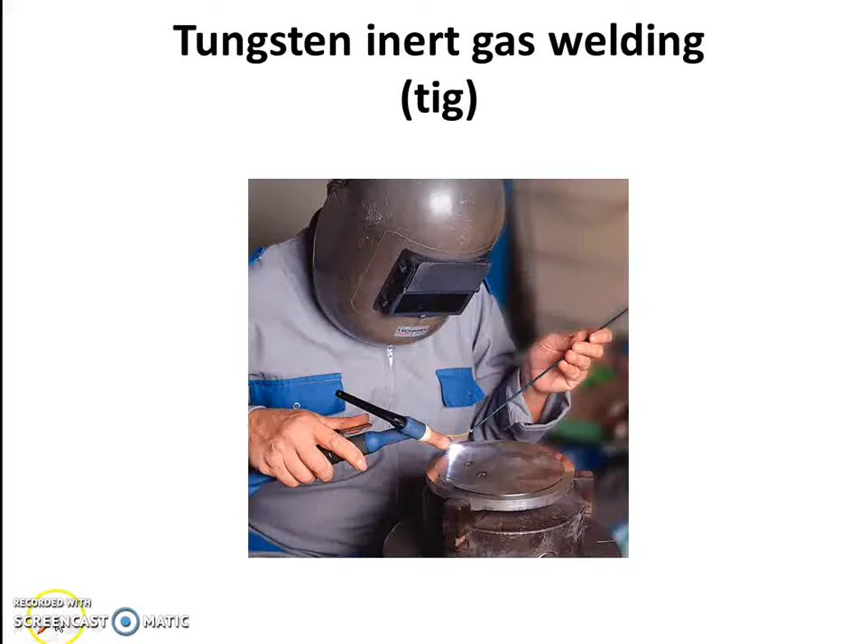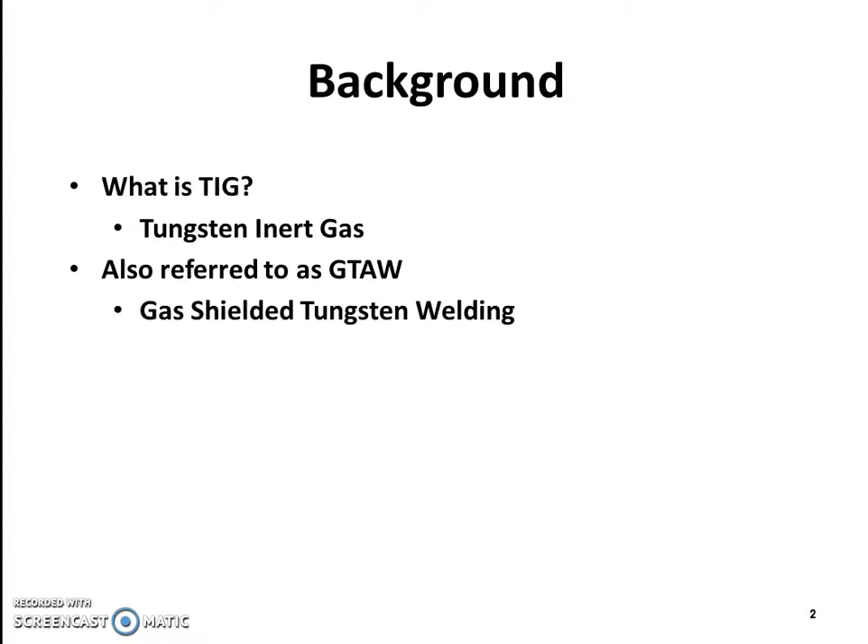Tungsten inert gas welding, or TIG welding. The background of TIG welding: it is also referred to as GTAW, that is gas tungsten arc welding. In TIG welding, a tungsten electrode heats the metal you are welding, and gas, most typically argon, protects the weld from airborne contaminants.

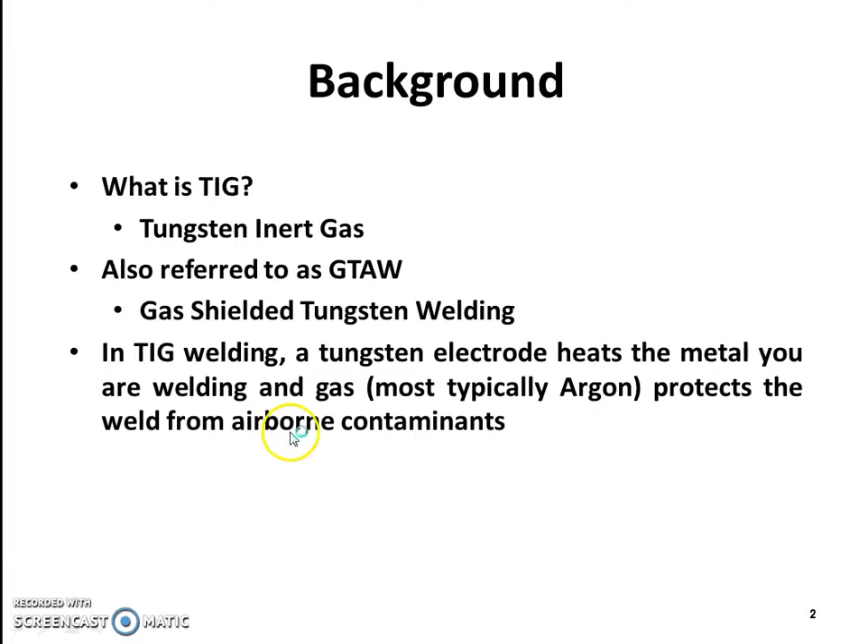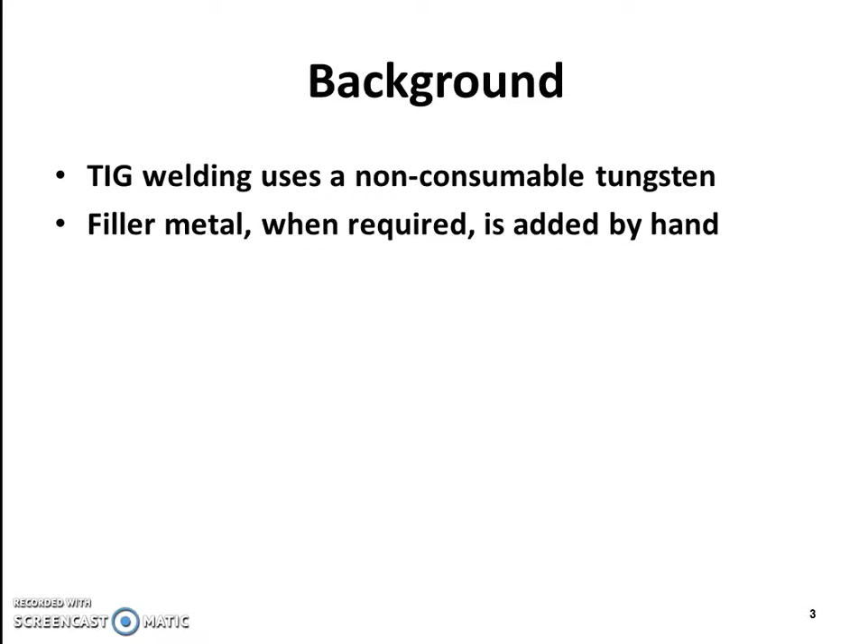TIG welding uses a non-consumable tungsten electrode. The filler metal, when required, is added by hand. Shielding gas protects the weld and tungsten electrode.

Gas tungsten arc welding, that is GTAW, is a process that melts and joins metals by heating them with an arc established between a non-consumable or uncoated tungsten electrode and the metals. The weld pool temperature can approach 2500 degrees centigrade.

The tungsten electrode is used to make the arc. It is contacted with a water-cooled copper tube to prevent overheating. A shielding gas goes through the torch body and nozzle toward the weld pool to protect it from air. A filler material for joining thicker materials is fed manually or automatically. This is the filler rod, and this is the shielding gas and the power source. This is contact tube.

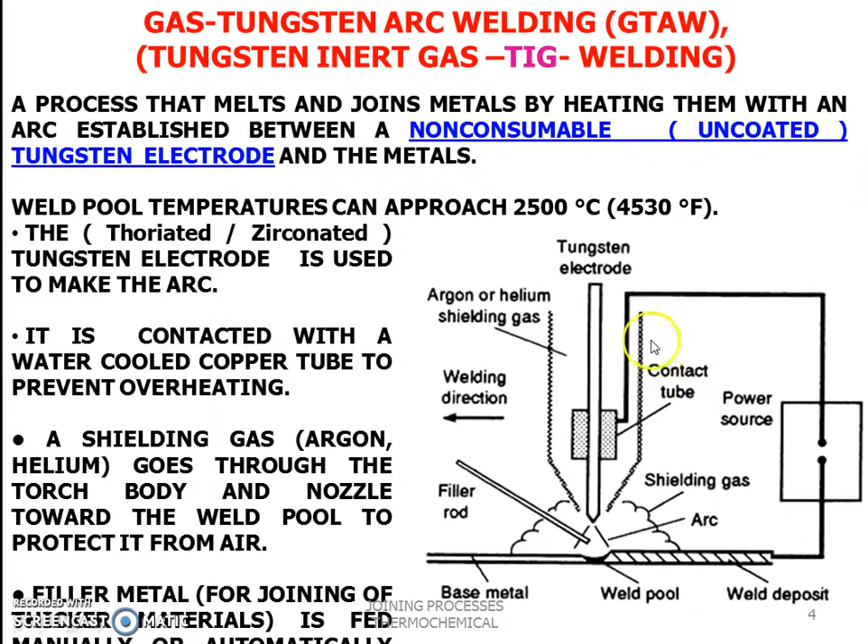Arc starting with high frequency. The torch position on the left shows the recommended method of starting the arc with high frequency when a torch is held manually. By resting the gas cup on the base metal, there is little danger of touching the electrode to the work. After the arc is initiated, the torch can be raised to the proper welding angle.

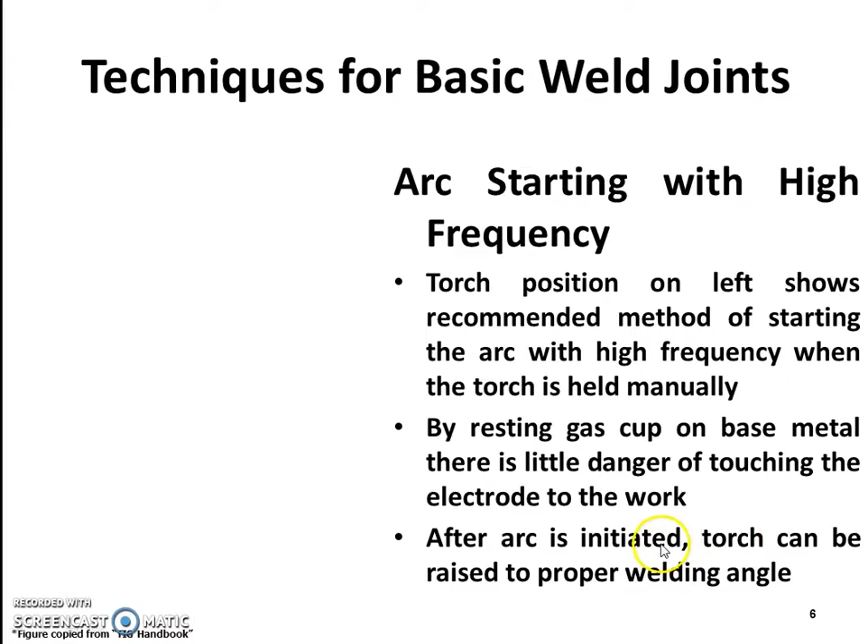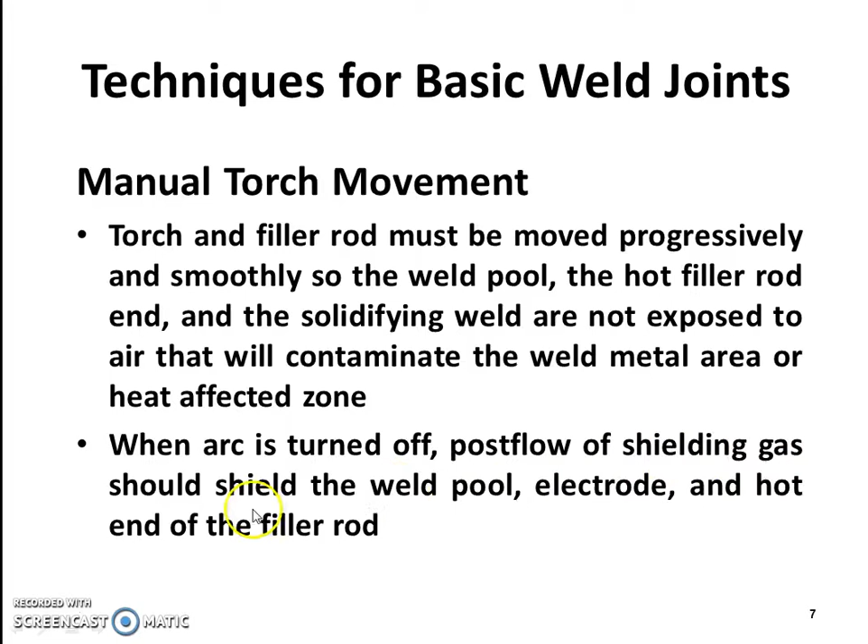Manual torch movement. Torch and filler rod must be moved progressively and smoothly so the weld pool, the hot filler rod ends, and the solidifying weld are not exposed to air that will contaminate the weld metal area or heat affected zone. When an arc is turned off, postflow of shielding gas should shield the weld pool, electrode and hot end of the filler rod.

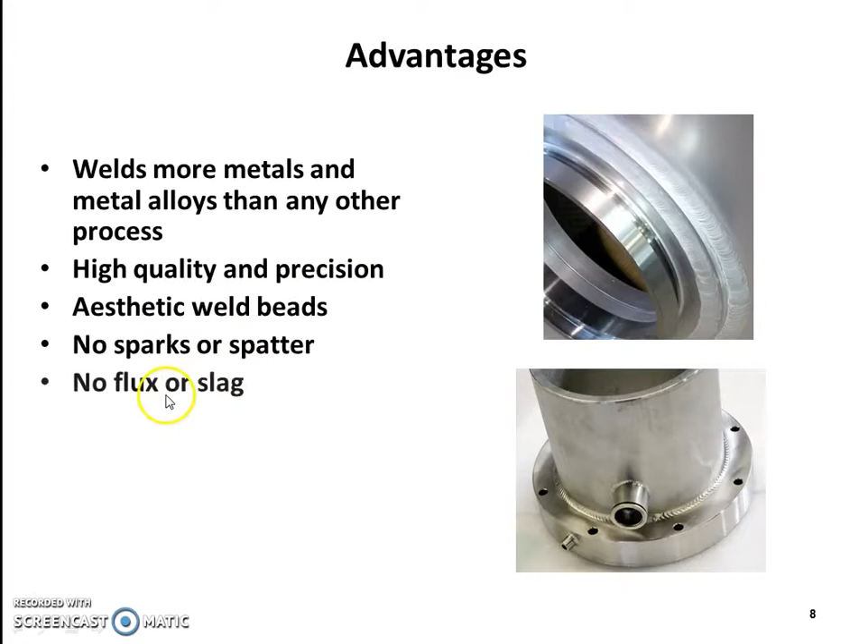Advantages. Welds more metals and metal alloys than any other process. High quality and precision. Aesthetic weld beads. No sparks or spatter. No flux or slag. No smoke or fumes.

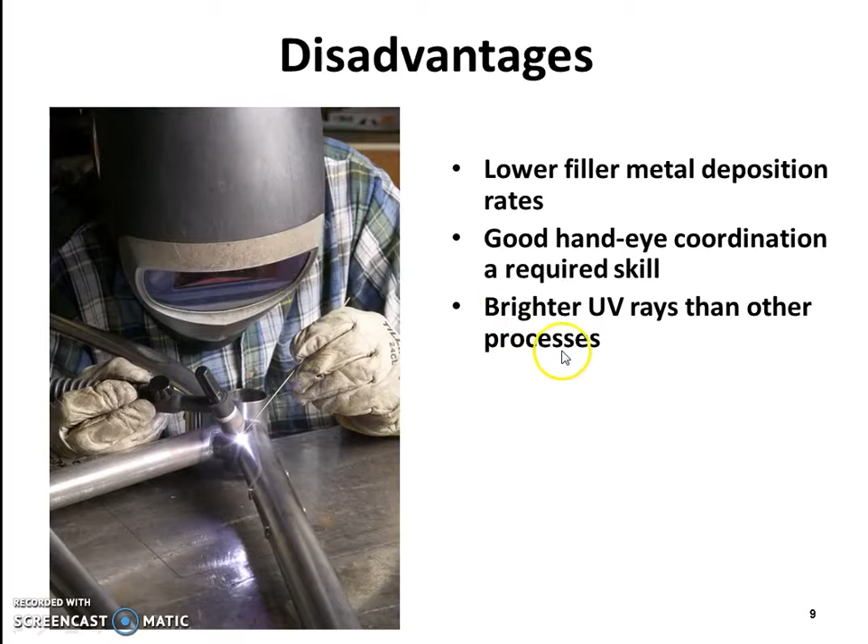Lower filler metal deposition rates. Good hand-eye coordination, a required skill. Brighter ultraviolet rays than other processes. Slower travel speeds than other processes. Equipment cost tends to be higher than other processes.

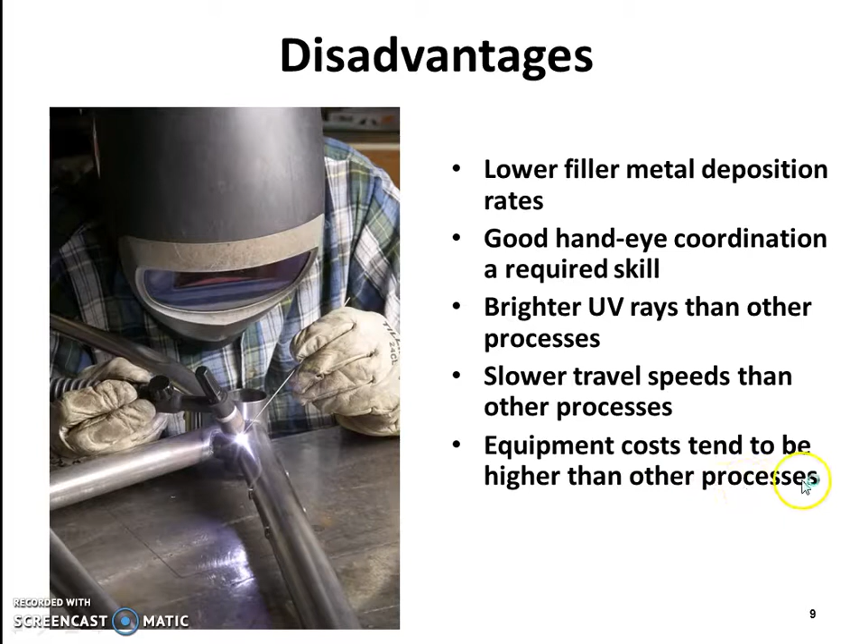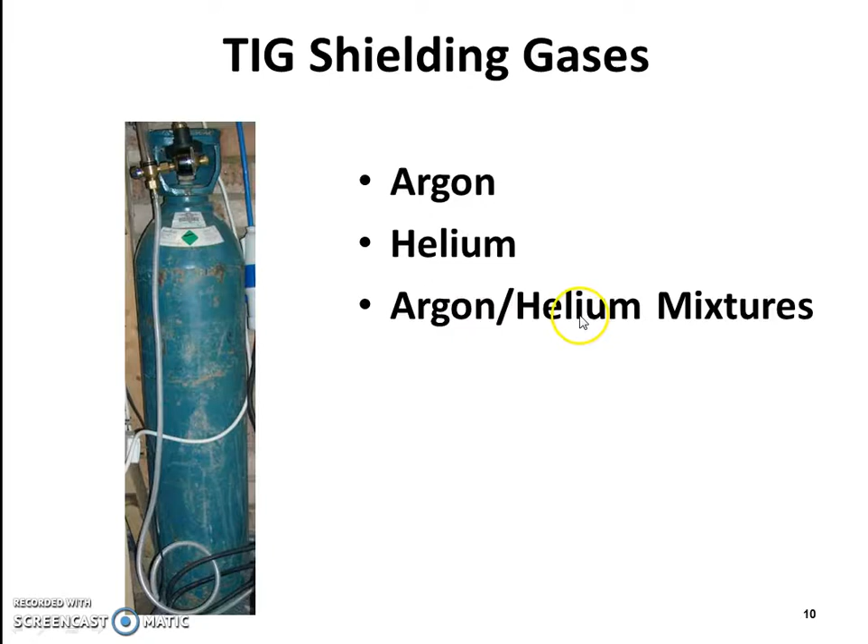The most used TIG shielding gases: argon, helium, and argon-helium mixtures. The differences between the advantages of argon and helium. Argon: good arc starting, good cleaning action, good arc stability, focused arc, lower arc voltages, 10 to 30 CFH flow rates.

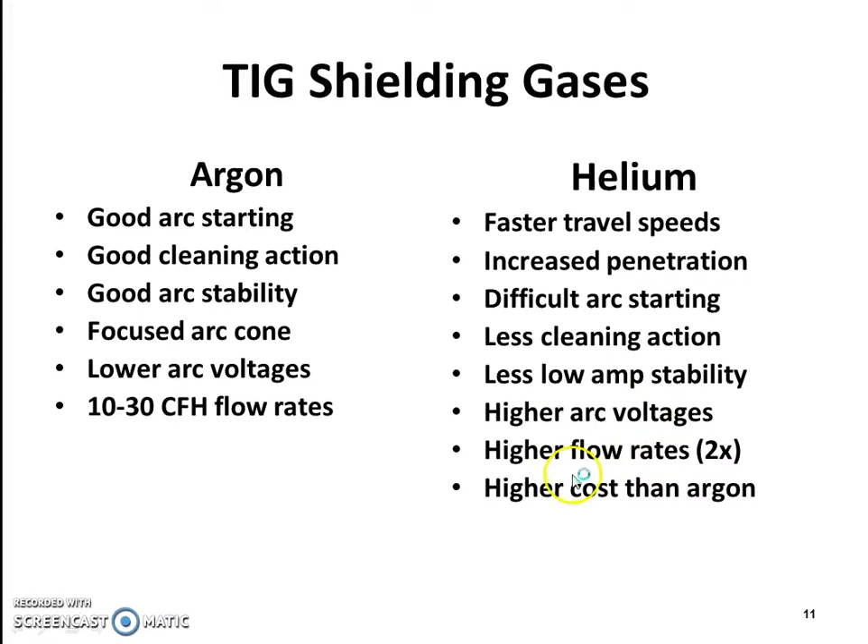Helium, the advantages: faster travel speeds, increased penetration; but difficult arc starting, less cleaning action, less low amperage stability, higher arc voltages, higher flow rates, higher cost than argon.

Argon-helium mixtures. Improved travel speeds over pure argon. Improved penetration over pure argon. Cleaning properties closer to pure argon. Improved arc starting over pure helium. Improved arc stability over pure helium.

Arc cone shape more focused than pure helium. Arc voltages between pure argon and pure helium. Higher flow rates than pure argon. Cost higher than pure argon.

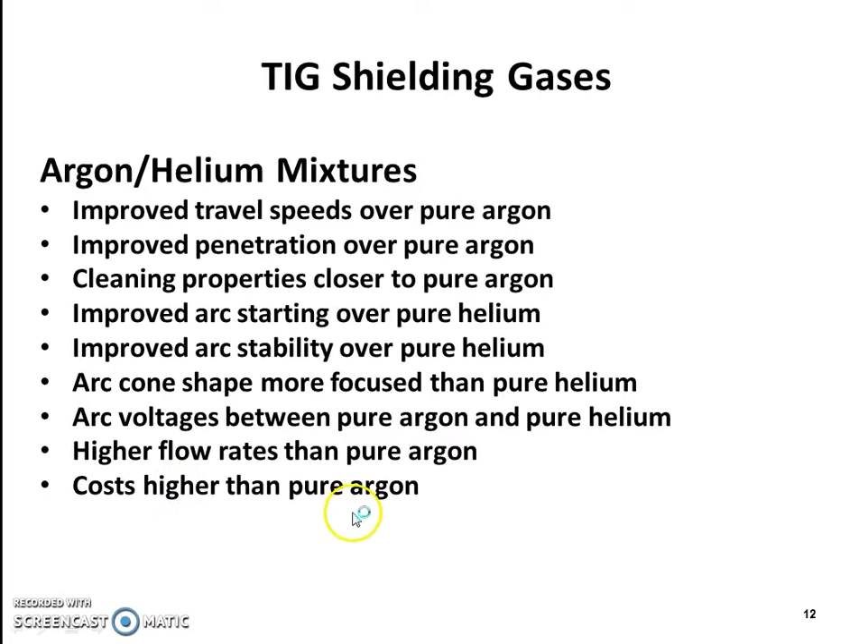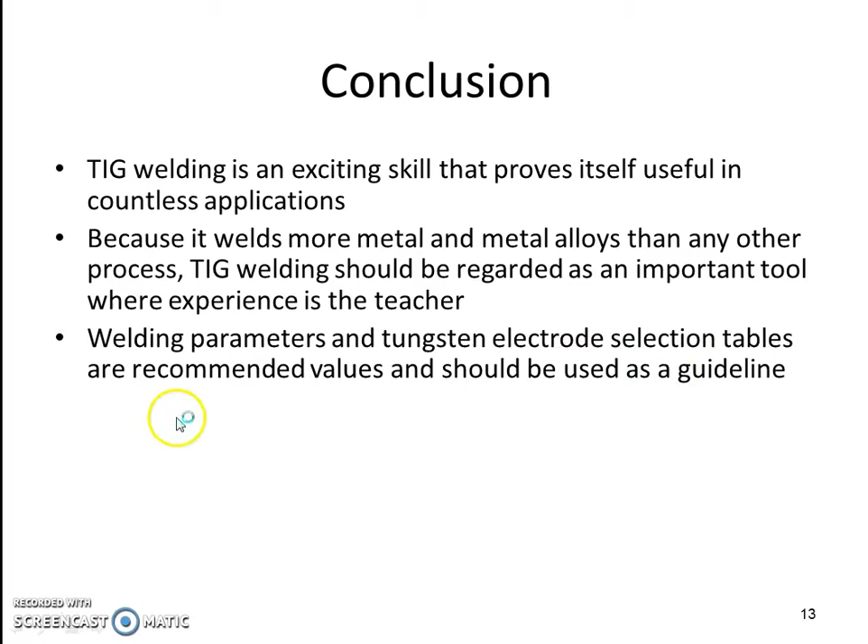TIG welding is an exciting skill that proves itself useful in countless applications. Because it welds more metals and metal alloys than any other process, TIG welding should be regarded as an important tool where experience is the teacher. Welding parameters and tungsten electrode selection tables are recommended values and should be used as guidelines. Information presented here is only the tip of the iceberg, and further research and hands-on involvement should be pursued to be comprehensive.

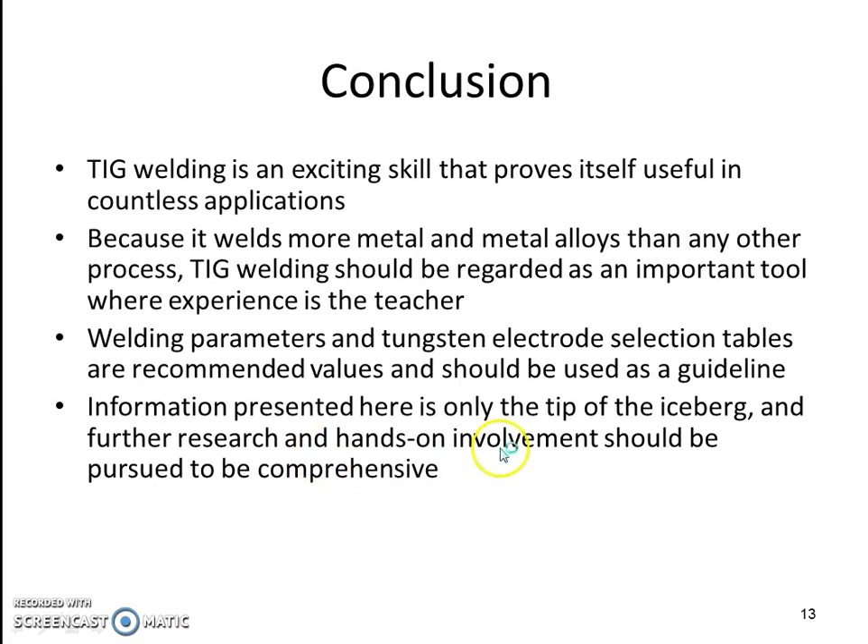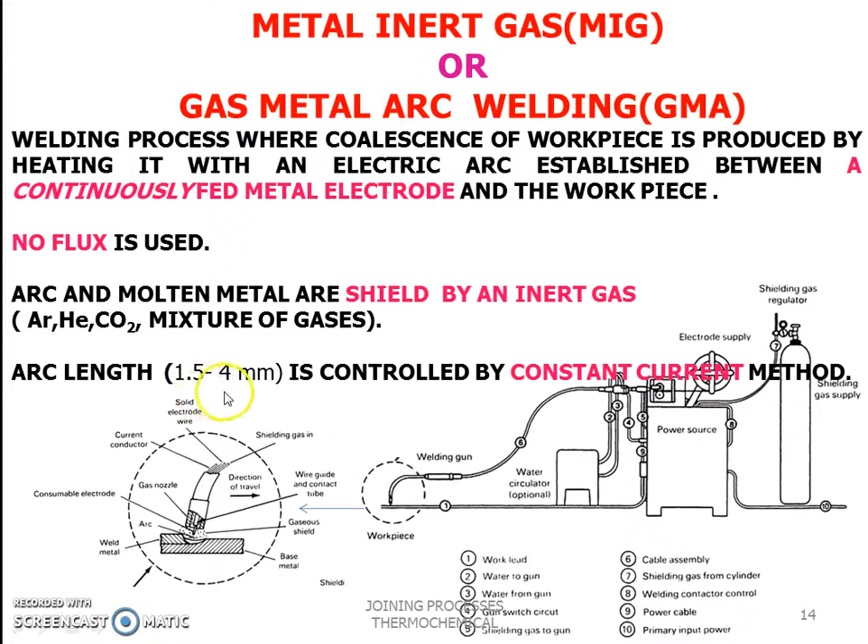The other welding process is metal inert gas welding, that is MIG welding. Gas metal arc welding is a process where coalescence of the workpiece is produced by heating it with an electric arc established between a continuously fed metal electrode and the workpiece. No flux is used here. Arc and molten metal are shielded by an inert gas: argon, helium, carbon dioxide, and mixtures of gases. The arc length, normally 1.5 to 4 mm, is controlled by the constant current method.

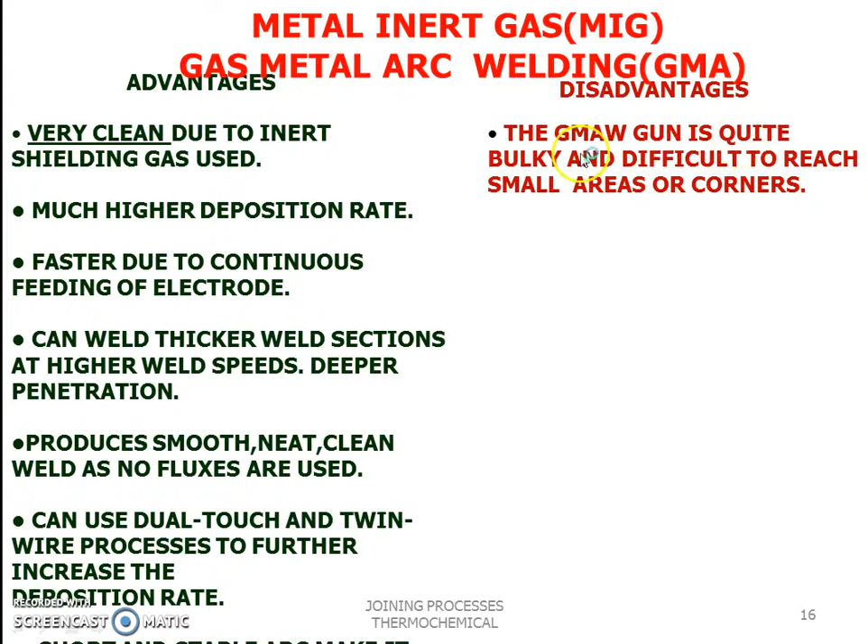The disadvantage is the gun is quite bulky and it is difficult to reach small areas or corners. Okay, this much is the